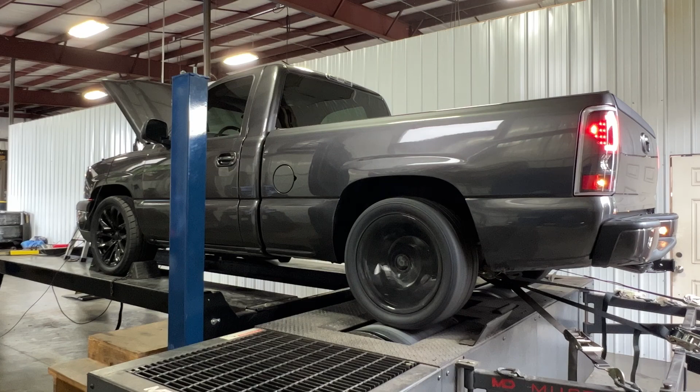So it's day 2. I worked on this truck yesterday and tried to get a video out, but I actually lost some audio, so I went ahead and just waited.

If some of y'all caught it, in the other video you'll see me wearing a Dr. Tunamal shirt, and here I'm wearing a Cletus shirt. That's because I actually refilmed the pulling-the-ECU part and the bench harness part again.

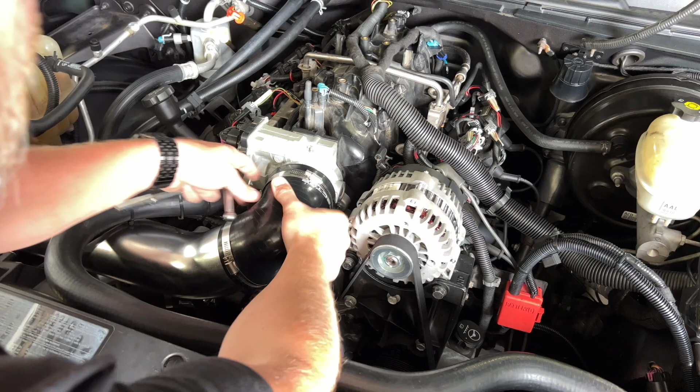Anyways, got the new throttle body. So let's go ahead and install this thing and data log it to make sure we got the problem resolved. Yesterday I'd already loosened up that intake pipe.

As you guys can see, somebody painted the outside of it to make it look good, but the inside is just nasty, and you can tell it's been in the truck for a while. I'm gonna assume these are 10 mil. They are over tightened, but they are.

Safely recovered all the washers. Next thing you're gonna do is pull this connector. Be careful with it, this connector is prone to getting broken. So there we have it, throttle body's off. You'll see it's pretty nasty, pretty oily. So let's get this thing swapped over.

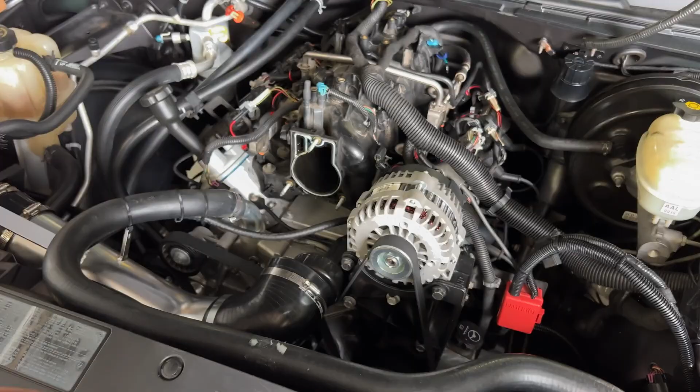All right, as y'all can see, genuine GM part. Please always do that. These reman throttle bodies will cause you a ton of issues. That thing was like $178 straight off of Amazon, and it was here in one day.

So we're in the truck now, throttle body's installed, letting the truck warm all the way up. You really can't compare idle desired airflow with dynamic airflow until the truck is warmed up, so there's no sense in me screen recording a truck warming up.

Currently AC is off, and dynamic airflow you'll see right here, we're averaging right around 11-ish, and you'll see right here we're around 11-ish as well. So where it was trying to pull like 5 or 6 grams per second of airflow, and idle desired airflow was showing like 5, now we're actually in the ballpark of where it wants to be.

So I can double check with the AC on. It's probably gonna want a little bit more airflow with AC on. That's normal with cam trucks, but we can watch and see. You'll see right here, we're 12.5, almost 13. We're a little bit over that, but that's just because it wants more idle adapt.

So anyway, the throttle body definitely solved our idle issue.

Now we can go ahead, and I'm probably going to drive the truck up the street, because the customer said one of his biggest complaints was how the transmission was shifting. I'd like to just feel it for myself. This does have my base file now, so it should have a trans tune in it that should shift pretty clean, you should be able to feel it, but it shouldn't be neck snapping.

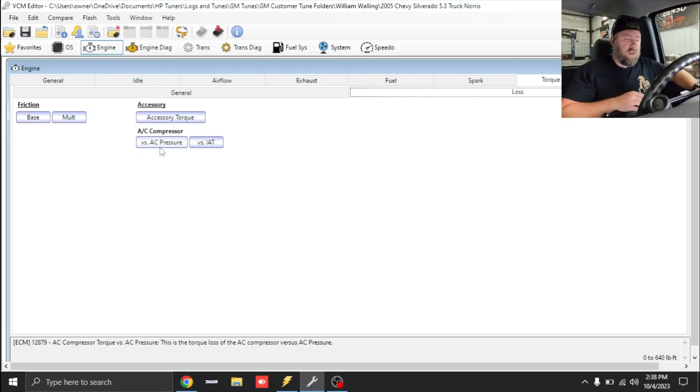So what I did was on the trucks, this table right here, this is under torque model loss, AC compressor, and this is AC versus pressure. This table right here is actually zeroed out from the factory. So what I do is actually on these, I just went and grabbed the stock torque settings for like a 2004 Chevy Corvette. So if you want to screenshot this and look, this is the settings that I used.

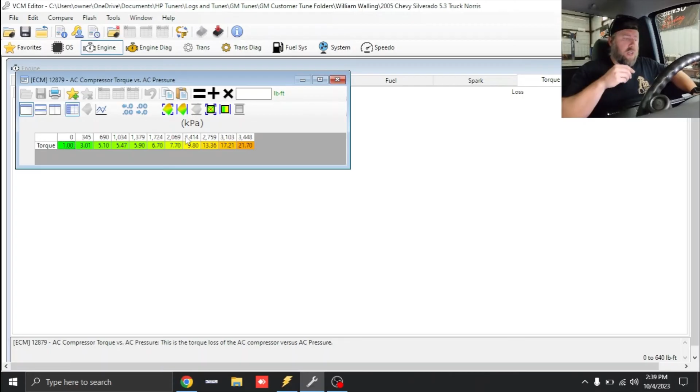These settings right here, got the truck damn near dead on with the AC adapt as far as the idle airflow goes. So again, it would have been all zeros across the board, but now it looks like this. This right here is KPA, which is based off of the AC pressure sensor, because this era of truck has a 3-wire AC pressure sensor, so it's actually a pressure sensor, not a switch.

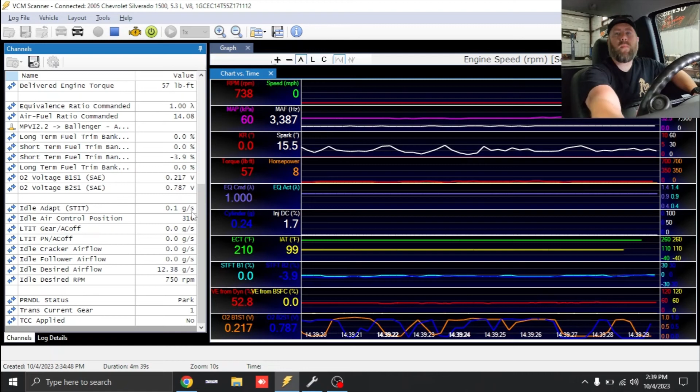So the truck actually understands the AC head pressure. Just by filling in this data right here, you've got the truck to where idle adapt is just a little bit off. Like I've told y'all, I prefer them to be pulling like a half gram per second or so. But then when I can kick on the AC, you'll see it goes right back to 0 versus adding 1.5.

Anyways, just wanted to show you guys that. So now I'm going to go ahead and get this truck ready to go out on the street and we'll test drive it. So everything's ready to go.

I just running over and grab my driver's license too. I don't like sitting on my wallet the whole time I'm tuning these trucks.

And also, I'll show you guys, I actually flipped over the cold air intake, the Spectre intake, but I had assumed somebody had modified it to where it wouldn't fit. So it looked hideous, but I guess they had it upside down for the high ram. So I kept looking at it, I'm like, man, I bet I can flip this thing back over. And so I flipped it back over, and sure enough, it was fine.

And this truck is showing like negative on fuel. I'm hoping it's telling me a lie, but I went and grabbed my driver's license and did not grab a credit card. So I'm gonna grab a credit card, and we're gonna go take this truck over to the fuel station.

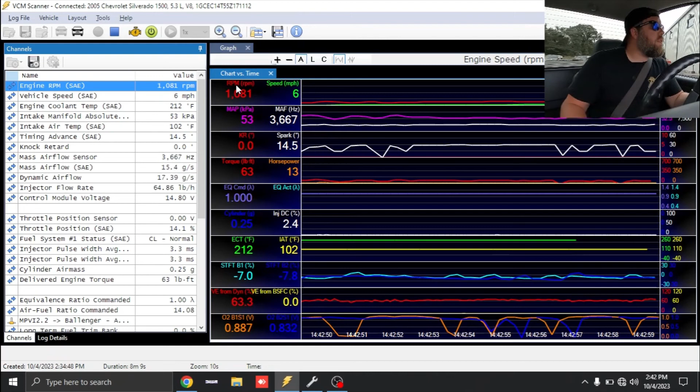So far, everything's looking good. Again, this is my base file. This is a combination that I tune. I probably tune 3 or 4 of these a week, sometimes via remote. Sometimes I'll just do quick street tunes at the house. But these things, I've got them pretty close.

Now, the MAF curve in this truck is actually still currently the one that was in it. That's one of the only things I didn't change in the tune-up, but I did change stoich. So the MAF curve actually was close-ish. Because I changed stoich to 14.08, that's automatically going to cause the ECU to run 4% rich, or 4.4% rich. So some of these short-term fuel trims are just based off of me changing the stoich, but I'm sure we'll have to make some minor changes to the MAF.

Again, I don't think this truck's ever seen a dyno. I think this was just a quick street tune that somebody did driving it around. But now the VE table's set up, cranking VE table's correct. Everything else is correct. I could not identify the injectors.

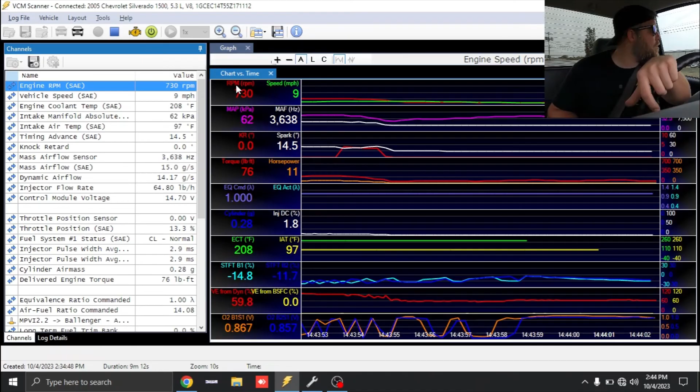But looking at the injector data, I will never do this normally, but I'm just going to have to assume that whoever did the tuning in this before used the plug and play data, because the data actually looks pretty legit. So we're just going to stick with it. So far, the VE table, everything is lining up pretty similar to what I would have with the stock injector truck. So I'm going to assume that their injector data is probably pretty spot on.

Anyways, we're going to drive this truck over to the fuel station and hope it doesn't run out.

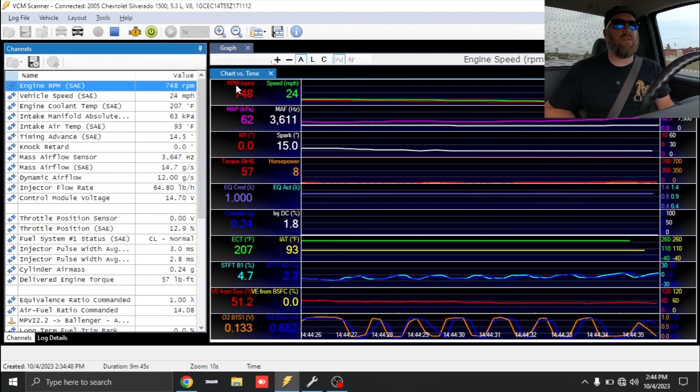Apparently, this truck was sitting outside over the weekend, and the customer's son decided that he wanted to come to the shop and rev the truck up for 30 minutes. So if the son is watching this, we know that was you, and that's really not good to do that on an untuned truck. I wouldn't do that.

All right, I'm going to put fuel in the truck. I'll be back. All right, we're back in the truck.

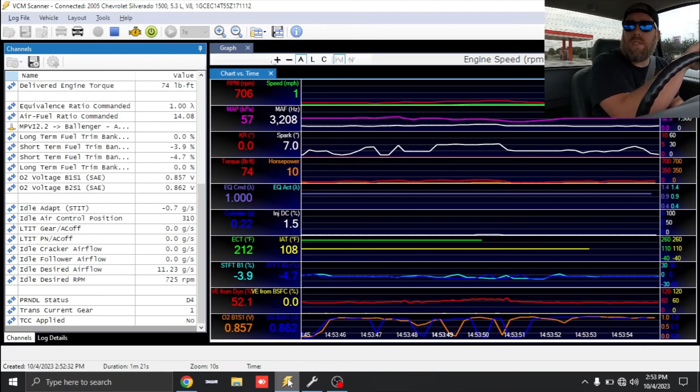Apparently the gas gauge does work, so we were just about to run out. Anyways, truck seems to be driving good. Transmission feels good. I haven't gone through any of the shift points or anything yet, but as far as my pressures and shift times and things like that, the trans feels great. So let's get back to the shop, and I'll move that Mustang off the 4-post, and we'll go ahead and put this thing on the dyno.

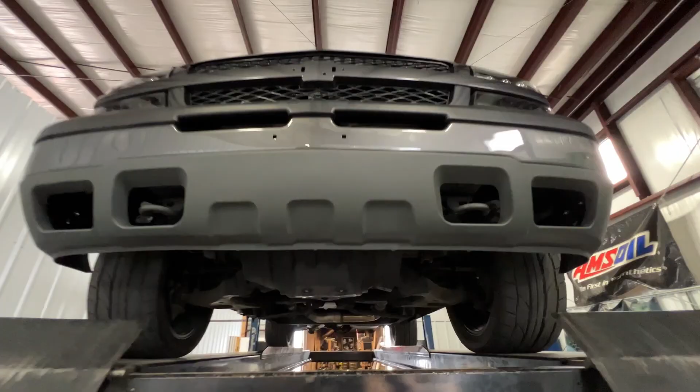So as always, we're going under the truck. Look everything over. Engine is new. Tires look good.

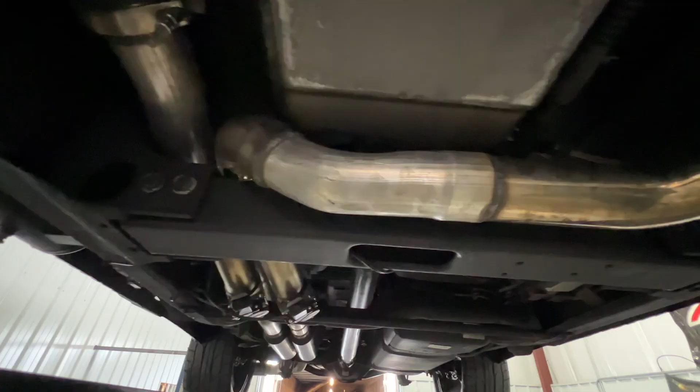Exhaust looks like it's got some Pacesetter painted headers with some welded-on V-bands. So I guess that works. They decided to do some crush bent pipe there, which is kind of strange, but I guess it works. Same on this side - it's got just a random bend from a Speed Engineering kit up there. Put some cutouts on it. Didn't even know that, I'm assuming there's a switch in there, so we may try those. This exhaust should be free-flowing enough though, but we may do just a pull before and after with the cutouts open and closed.

It's true dual 3-inch, got some Flowmasters back here. This all looks good - it's all crush bent stuff, but it looks good. Drive shaft has been replaced, so that looks brand new. Transmission's also been replaced, so everything looks good under here. So let's get this thing down and get on the dyno.

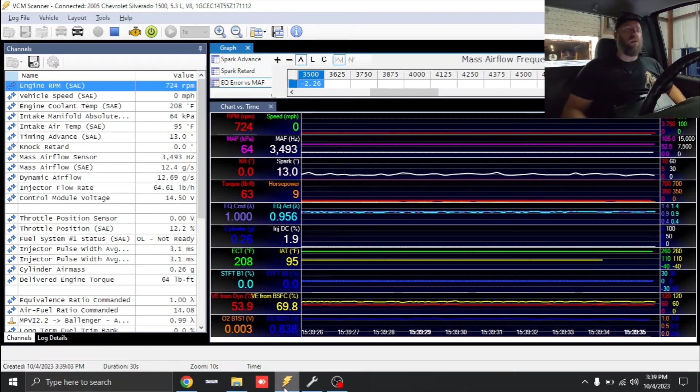All right, so got the truck up on the dyno now. Dyno is set up in vehicle simulation mode. My wideband has been installed - I installed it in just one of the front bungs. So the truck is now in open loop. I am using the Ballenger AFR 500 V2 wideband. If anybody is wondering, it runs the NTK sensor.

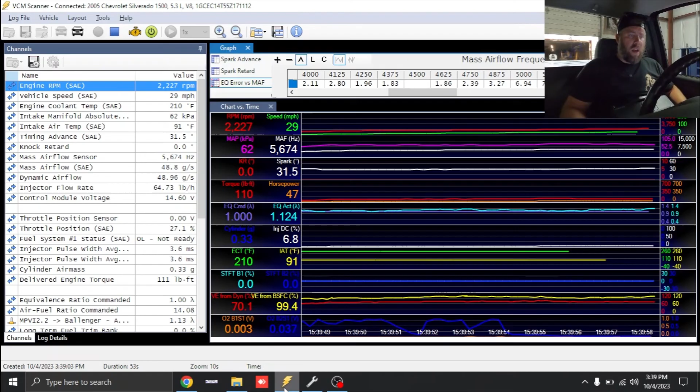So we're just going to drive the truck. I'm just going to run it up to second gear, just kind of get an idea. I've made some minor MAF changes, but nothing too crazy right now. I pretty much just pulled off the 4% that the MAF would have been off due to the stoichiometric point adjustment. So, as of right now, the wideband's showing the truck just a little bit lean in the mid-range. So let's lock this thing into gear and go ahead and roll into second gear.

So lifting. This thing was pretty lean - I mean, we're talking like 10% lean. So looks like we may have a conflict right here between our injector flow rate versus the VE from the Dyno. Anyways, for right now, I'm just going to make the adjustments on fueling and just keep going through pulls to try to make sure the truck gets to its happy spot.

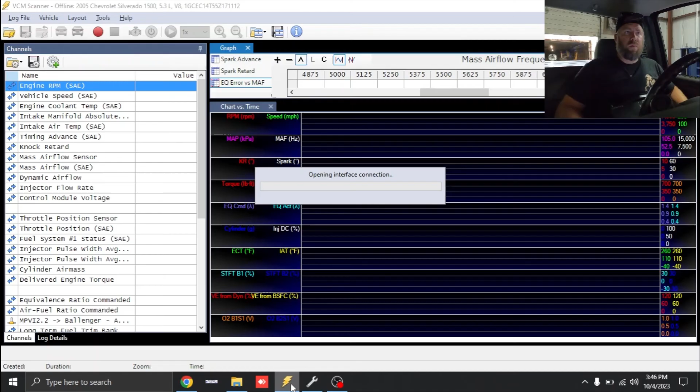All right, logging back into the truck now. Just made those MAF adjustments. Again, if you don't know what I'm doing, if you haven't seen me do this before, please roll back through other videos - I've done a ton of videos on MAF tuning as far as what I'm doing on the dyno. I don't want to have to do that in every single video.

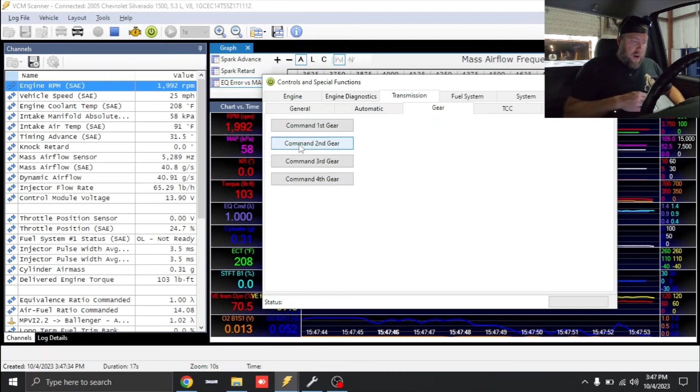So far everything's looking good though. We're going to go ahead and put this thing in second gear. We're in vehicle simulation mode, so I want to get to where we can do a wide open throttle pull and the fueling looks good. Right now I'm still kind of thinking that the injector data is wrong, but I'm going to do some more pulls and compare it to data that I have on past vehicles and then determine that.

All right, so that was a pull to 6,450 or so - looks halfway decent. Just working through fueling on this. Looks like we're still a little bit off, but nothing crazy. You can see right here, this is commanded versus actual - we're only a couple percent off. So I'm not too terribly concerned about that.

Looks like we have a touch of knock up top. Knock sensor sensitivity is factory, so what I'll do is I will pull that timing out, and then if it actually goes away, then it may be valid. If it doesn't go away, then we may have some false knock. This truck is honestly not getting very high up on the MAF frequency, so it may not be as strong as I would have anticipated.

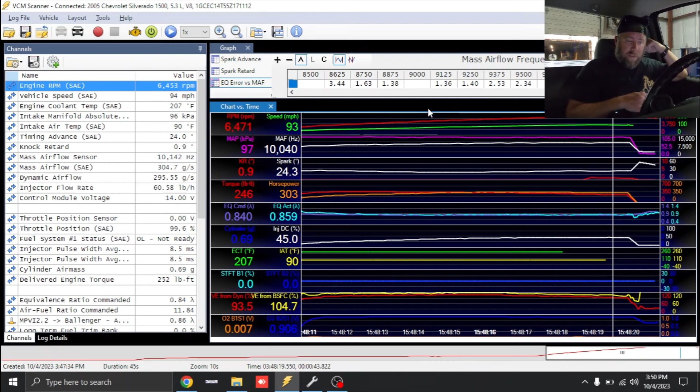But I'll compare my MAF curve to other MAF curves I've done, and as long as we're in the ballpark, we'll let it ship. Even the horsepower calculator is showing a little low on this thing. So anyway, I'll do some fuel tuning and we'll do some more pulls.

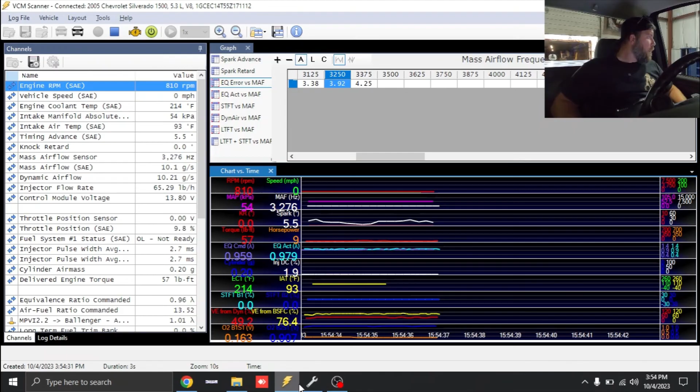Everything looked good data-wise, so I've adjusted the fuel. Went ahead and set up the dyno—we're gonna do a 3,000 to 6,400 pull. This one's loaded in second gear, so the pull will be longer, but that's okay. If I didn't say it already, I anticipate this truck making somewhere between 290 to 310 horsepower. If it's lower, something could be wrong; if it makes more, great—the customer will be happy.

Everything's looking good, so I'm gonna start the camera outside and let's do a pull.

Alright, so as y'all see, we've got some knock showing up top. Felt it in the truck—it felt like it was pulling timing out. I don't know that it was actual knock, I'll have to check the video you guys just watched, so I'll check it and see. Well, let's get out and see what kind of power this thing made.

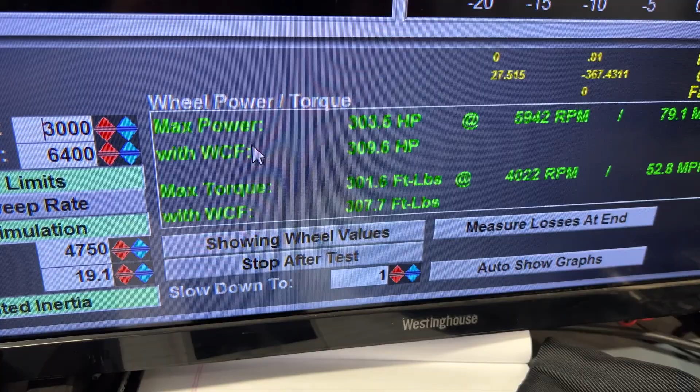Alright, so we have—oh, not bad—309.6 horsepower, 307 foot-pounds of torque. You can see right here where the timing ripped out, so it's definitely going to fall short pulling that much. I can actually pull up the trace, so we'll just click view trace.

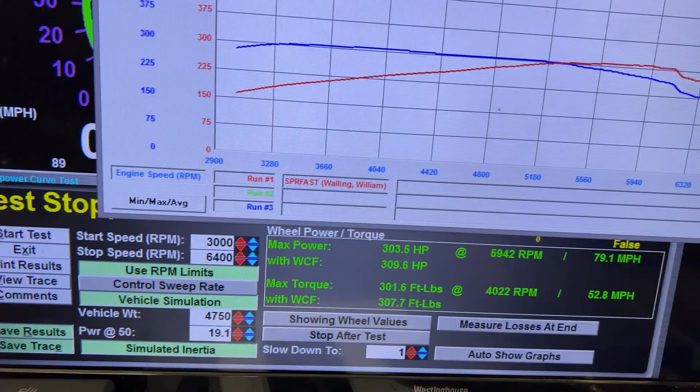So here, I'll rescale this thing. You can see right here, that's all timing being pulled—it's literally just false knock. So I'll tinker with the sensitivity on the knock sensors.

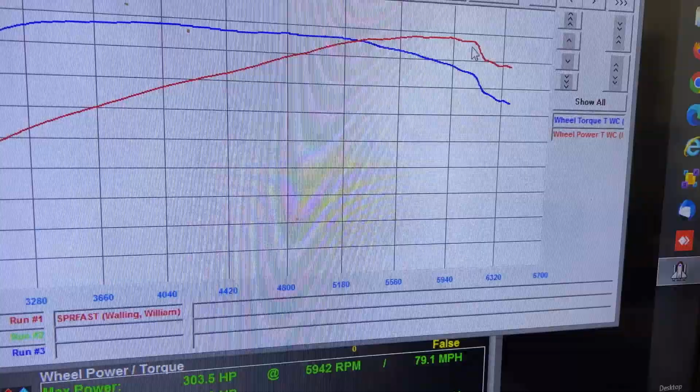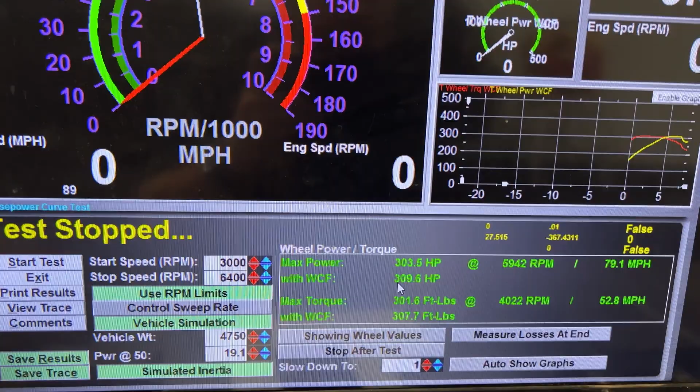This thing's making some power. Like I said, I thought it was going to do between 290 and 310, so it's almost 310. For you guys that are new here, this is a Mustang dyno, so it reads about 10% lower than a Dynojet—that would put it right at 340 to 350 at the wheel, somewhere in that ballpark. We still haven't got all the timing in there yet, so I'm gonna make some adjustments to the knock sensors and we'll do another rip.

We're logged back in the truck after doing that dyno pull that made 309 horsepower. I've made a slight change to knock sensor sensitivity. This is probably gonna be our final pull. Again, for those new here, I tune this setup a lot—I mean a lot—so I pretty much know right where they're gonna want to be.

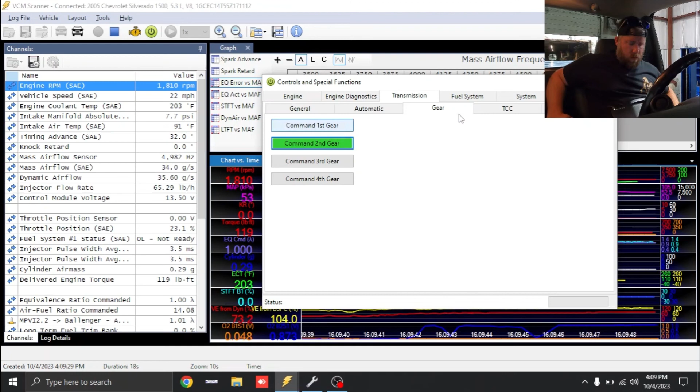So again, we're gonna do a 3,000 to 6,400 RPM pull. I'll get the transmission into second gear locked. It says vehicle simulation mode, open loop. So let's go ahead and roll into it.

Still showed a touch of knock up top, nothing terrible though. Again, if you're new here, I adjust the high octane and low octane tables so the truck can automatically tune itself as far as ignition timing goes. So me seeing a little bit of knock is not a big deal.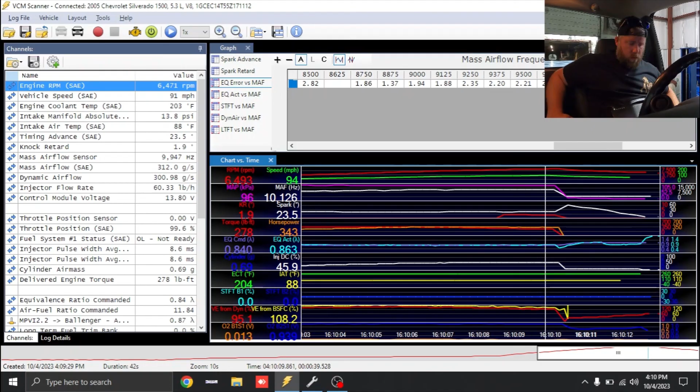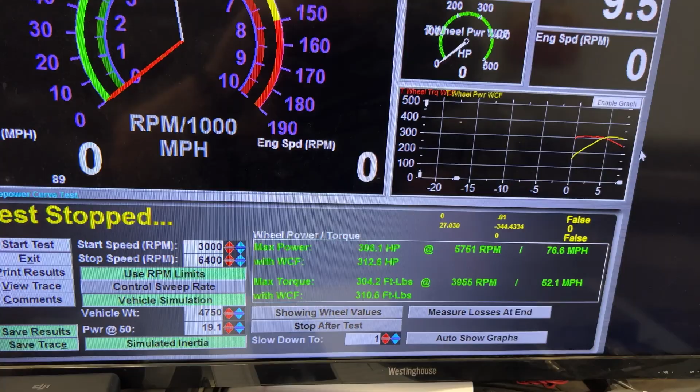So let's get out and see what it made. Alright, so 312 horsepower, 310 foot-pounds of torque. Again, I didn't put any extra timing in it—I actually just adjusted the knock sensors so it wouldn't have that big strong dip.

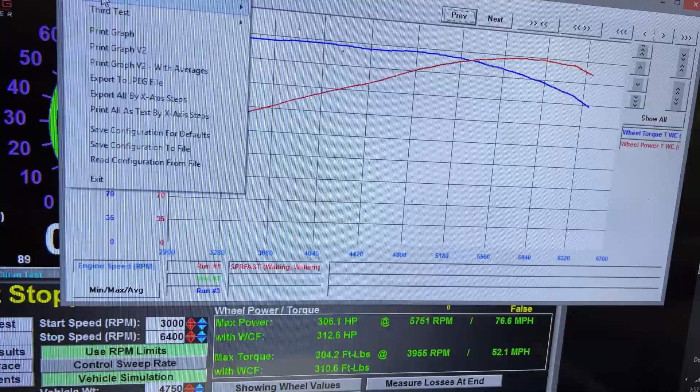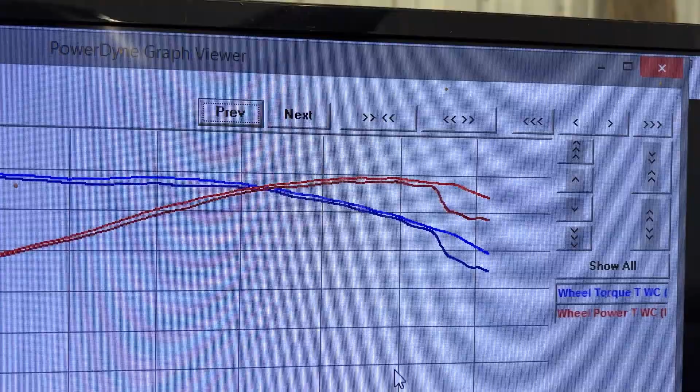So we'll scale this thing up and I'll go ahead and add the other one. You'll see where I adjusted the knock sensor sensitivity so it didn't rip all that false knock out—now the curve actually looks smooth. It's okay that it's showing a little bit of knock because it may actually have a little bit. The truck is warm, so the only reason you're gonna see these gains right here is because the truck cooled off for a few minutes.

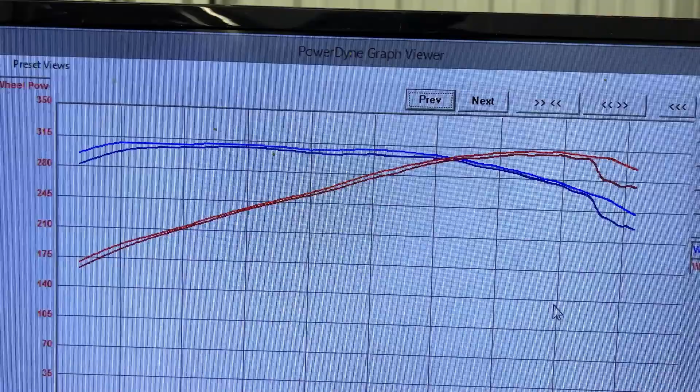I think when I did that first pull it was like 212 degrees. That pull was in the lower 200s. So again, I tune these things at the normal temperatures and the normal everything that you're gonna be driving them on. I don't let them cool off and do all the crazy hero pulls.

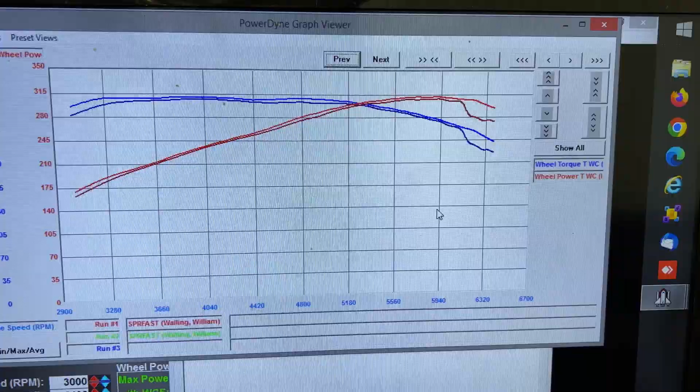So anyways, we're gonna call that good on the power pulls and let's roll into the trans stuff. We're gonna do some dig pulls on the dyno. All right, so we're down to the last little part of tuning.

We used the Blue Cat tool to set up the transmission shift points. We're gonna target like a 6,300 to 6,400 RPM shift. If you haven't seen that video, just check out the video with the green truck, on the thumbnail that says 4L60 tuning, that'll teach you how to do the Blue Cat tool.

Let's go on and do this thing from a dig. So I'm gonna go on and pull it down in the third, D3, and start the rear camera. We're gonna stall it up just a touch and launch it.

All right, so this thing's still showing a bunch of false knock up top. Not real sure what that's about. Didn't show it on the 1-2 shift, it just showed it when it was loaded into gear. Anyways, right now I'm just worried about trans stuff.

So all right, so we got a 6,300 RPM shift. It's not terrible. I'll probably bump it up just a little bit more than that.

MAF is still just a little bit off. I'm gonna go ahead and make an adjustment there. And I'm going to make an adjustment on the knock sensor some more up top. So that's where I'm at right now. I'm gonna do that and I'll be right back.

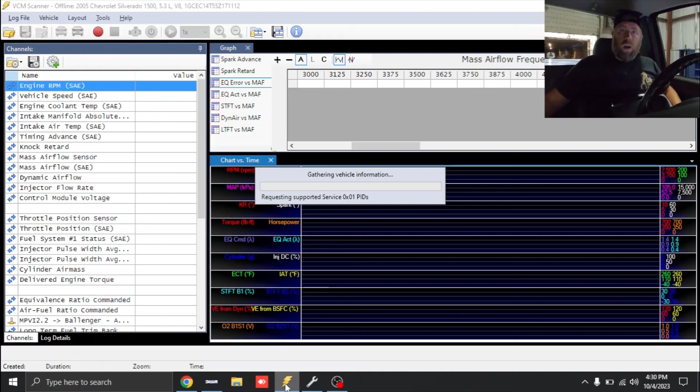All right, so we're back up in the truck. We're about to do the second dig pull. I added 2 miles per hour to the 1-2 and the 2-3 shift, both on the up shift and the down shift side at the very, very top. I made a slight adjustment to the MAF, and that's really about it. So let me start the rear camera. We'll stall the truck up a little bit, and let's do a hit.

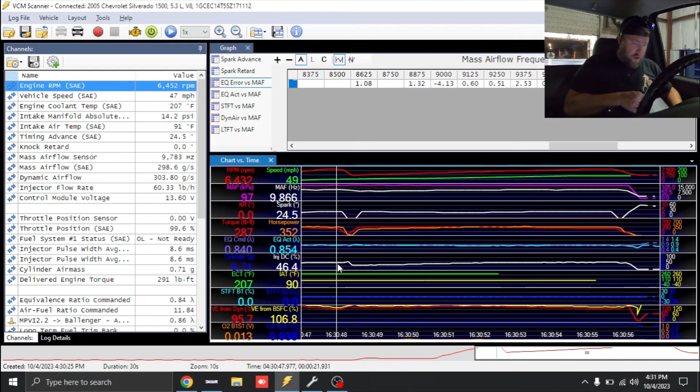Alright, so I mean, that's pretty much on the money on the shift, 6,400 or so. Fueling looks basically dead nuts on. Two, three shift looks good. So yeah, I mean, we're pretty much done on here. So let me get this thing off the dyno and we'll get it out on the street.

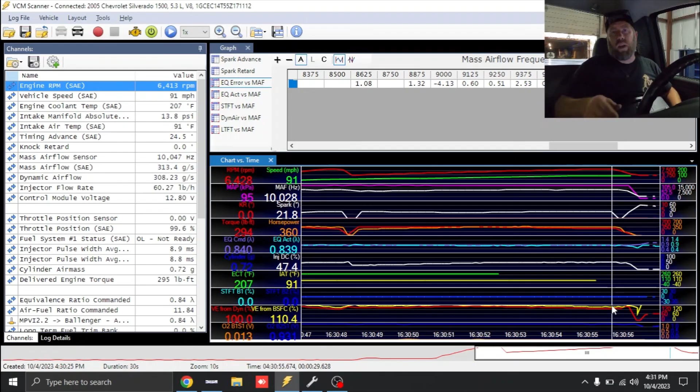All right, so we're gonna go on the final test drive. Don't do a crazy long test drive as we already drove it earlier. Cut this AC on, just gonna buzz it up the road, make sure shifts and everything feel good. Fuel trim's looking clean.

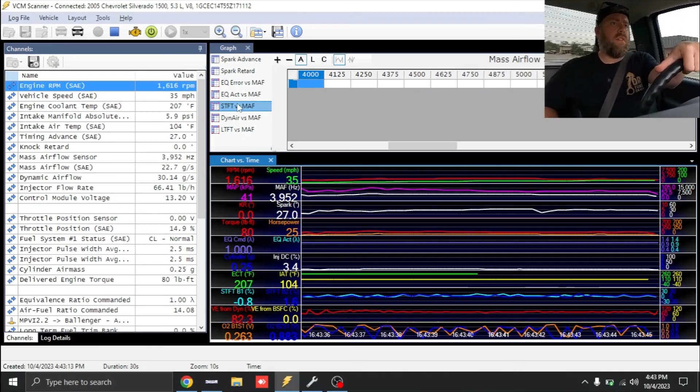Now again, if you're new here, I tune everything where it's in hybrid mode, where we're MAF above 4,000, VE below 4,000. High octane, low octane tables function as normal. I mean, everything works just like factory, so we don't do any shortcuts here.

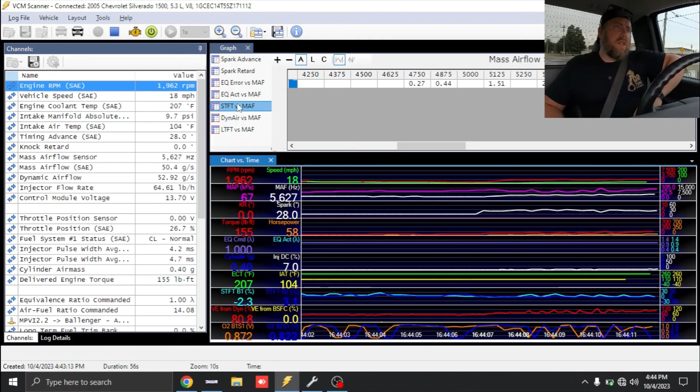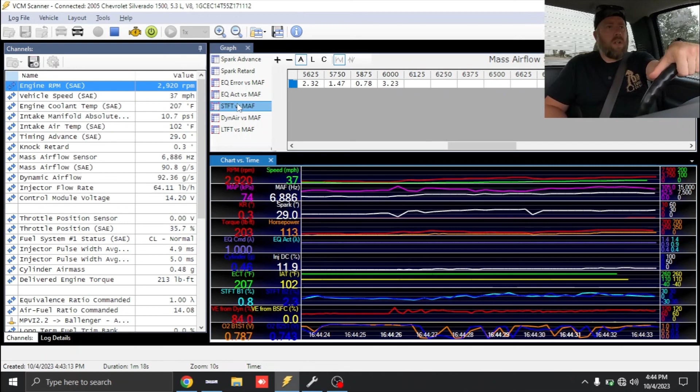Truck feels good though. Throttle's responsive. Comes right back down to idle like it's supposed to. Exhaust is a little droney, nothing too bad though.

Laptop's about to die. Bought a 12 volt charger from Amazon and it worked good for a little bit, but it's not working that good anymore. So I've only got a couple minutes to go on the laptop.

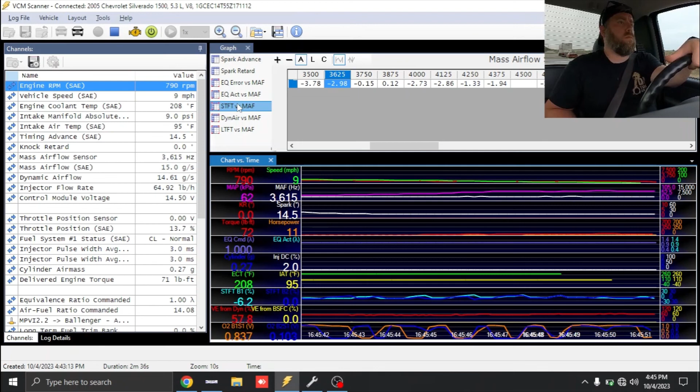All right, so I'm gonna spin this thing around and come to a complete stop, and we're gonna brake torque it, act like we're about to do a burnout, and just make sure that it doesn't crash on idle. No, she looks good. Cool.

All right, so I'm gonna pull out. We'll do a wide open throttle hit. Let's get out in front of these guys. All right, see what it does.

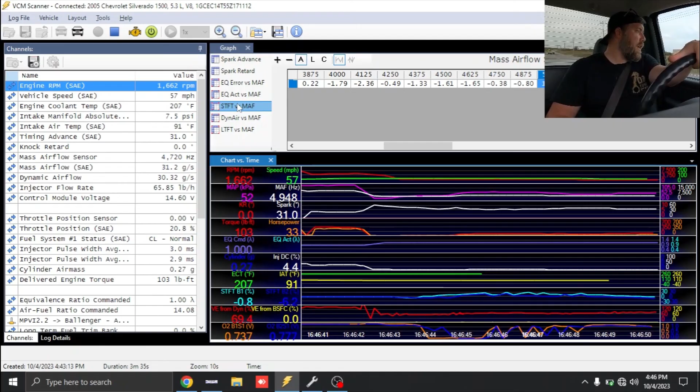Felt pretty good. Shift was on time. All looks solid. So we'll call it done right there.